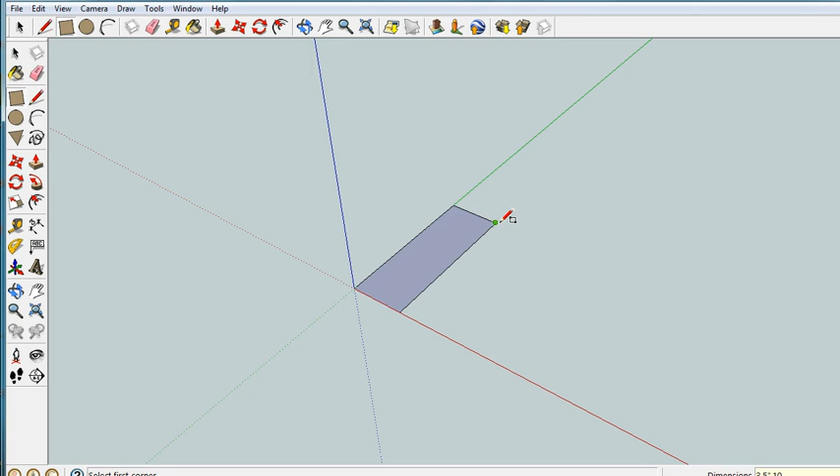Now we're going to come up with the back, and we're going to make it exactly the way we did the top as far as starting goes. You'll just make a rectangle, and in this case it's going to be 3.5 inches by 10 inches, and it should look like that.

Now we're going to do the same thing we did before. Pull this up at 1 inch, then go to camera, standard view top, zoom extents. Again, camera, parallel projection. Now it's nice and straight.

We're going to make 3 holes in here, but first we need to come up with some guidelines. This guideline from the bottom up is going to be 1.5 inches. If you look at that, it doesn't look visually centered because we want our pegs just slightly lower than center so we can actually use the pegs and not hit our hands on the shelf when putting things on them.

Now we have another guideline up here. That one's going to be at 2.5 inches. That is sitting right there.

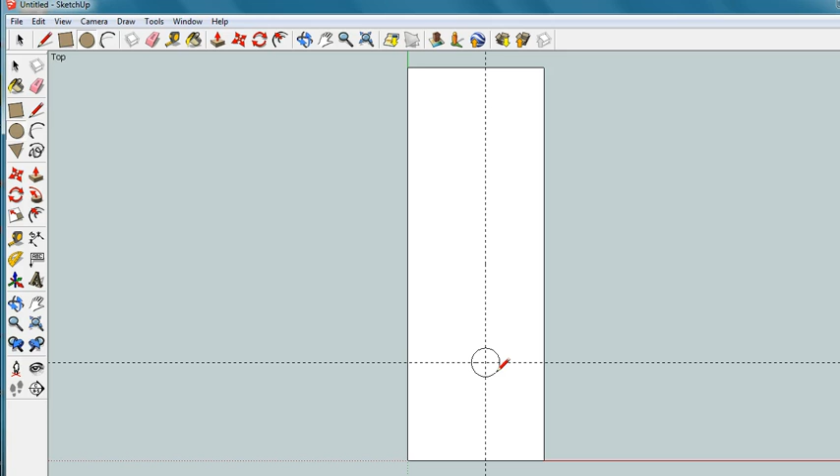We're going to pick up our circle tool. Now when we come up with the dimensions on this, it's on radius. So the diameter is 1/4 of an inch, and half of a 1/4 inch is 1/8. Just double the denominator. So we can put 1/8, or use the decimal equivalent - the machine doesn't make a difference which one it uses.

Now at this point we can go back to our isometric drawing. We're going to go ISO. Here we want to select it slightly different - I want to be able to see through this. So I'm going to go up to View, Face Style, X-Ray. I can actually see through this.

I'm going to pick up this tool here, the push-pull tool, and you can see how I'm going down deep. I'm going to go 0.5 inches deep, and the reason I've got this as an X-ray is so we can actually see this and duplicate it. We're going to duplicate this 2 more times.

So we're going to pick up the select tool, and starting in the upper left going to lower right, we're going to select the whole thing. Now if you go lower right to upper left, you're going to select more than you want. Now we've got this selected.

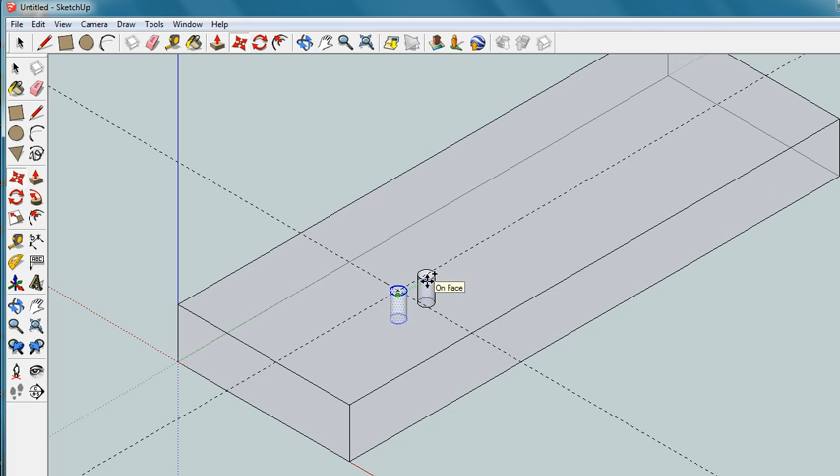We're going to click the move tool. We're going to hold our control key down, and then we're going to slide this over. You're going to make sure it stays on that line, and we're going to type in 2.5 inches, and it's over there exactly 2.5 inches.

We're going to do it again because we need one more. We're going to hold the control key down and slide it over 2.5 inches, enter. So we should have 3 evenly spaced holes.

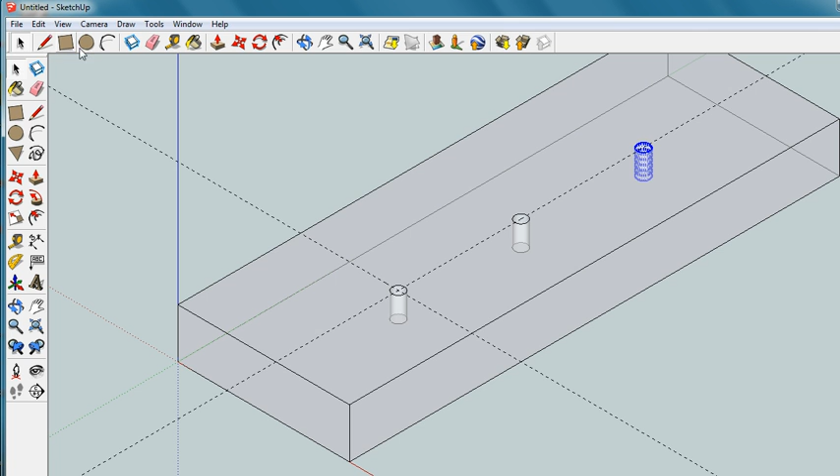Now we can go back to our view, face style, uncheck X-ray, and we can look at this and see that we have holes halfway through our part.

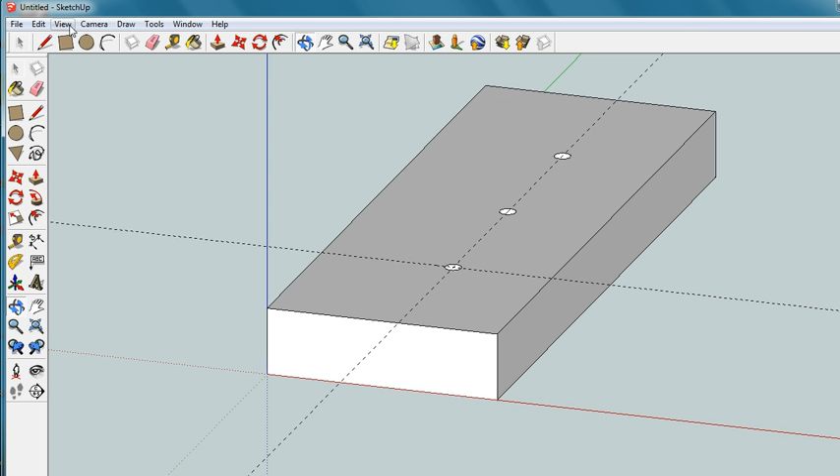Now we need to make a curve along this bottom edge here. We can do the same thing as we did before. I do believe that the standard view on this is going to be the front - let me double check to make sure it is the front. Yep, it is the front. So camera, standard view, front.

We're going to knock a piece off of here. What we can do is just go 1/4 inch over, 0.25 inch, and then 0.25 from the top. It was already snapped at 0.25.

At this point I'm just going to do a straight edge across, like that. I could use the follow me tool, but in some instances it's a lot easier to just pull it through like this. We're at the end - save your work, and you're done with the next part.